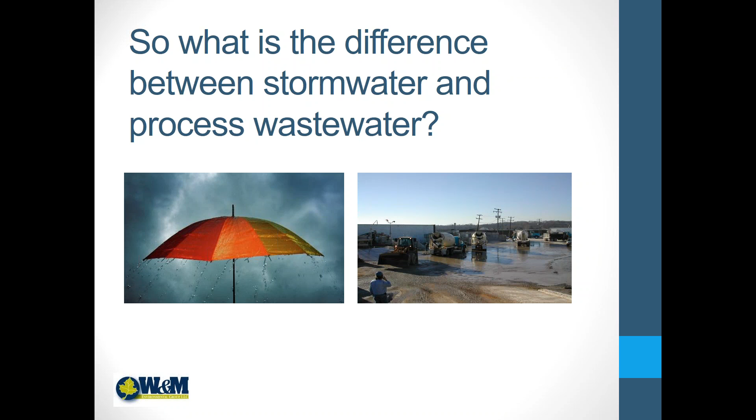So quick overview on TXG11 versus TXR05, because I know a lot of people are familiar with that stormwater only permit. The TXG11 is for those specific SIC codes along with a determination from the TCEQ if you think you're an associated facility, whereas the TXR05 covers a whole list of sectors and SIC codes and businesses that perform the same business in that sector regardless of their SIC code. You can authorize a ready-mix plant under the TXR05 under Sector E, but that is stormwater only, whereas the TXG11 allows you to discharge both process wastewater and stormwater.

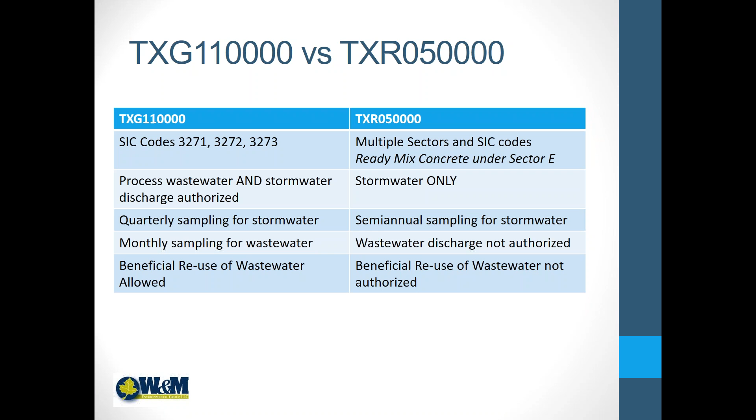So a couple of differences. A stormwater discharge under TXG11 requires quarterly sampling, whereas it's semi-annual sampling for the TXR05 permit. Wastewater is allowed under TXG11, and that permit requires monthly sampling of your wastewater, and no wastewater discharge is allowed under TXR05. The TXG11 also allows for beneficial reuse of wastewater for dust suppression and other things, which we'll go over later, and that would not be allowed under the TXR05.

So implementation. If you've decided the TXG11 makes sense for you, you have a wastewater runoff, the first step would be to figure out what type of water discharge you have. So we know stormwater only.

If you can contain all of your wastewater on site and none of it runs off and you only have a stormwater runoff, that is what I would consider a stormwater only discharge. Processed wastewater obviously is when you have that wastewater that goes out through an outfall or somehow it flows off your site. You can easily have both separately if you have some pits separated on one side of your site that discharge, and then you've directed all your stormwater through your stockpiles, for example, to an outfall on the other side of your site. You can have separate discharges.

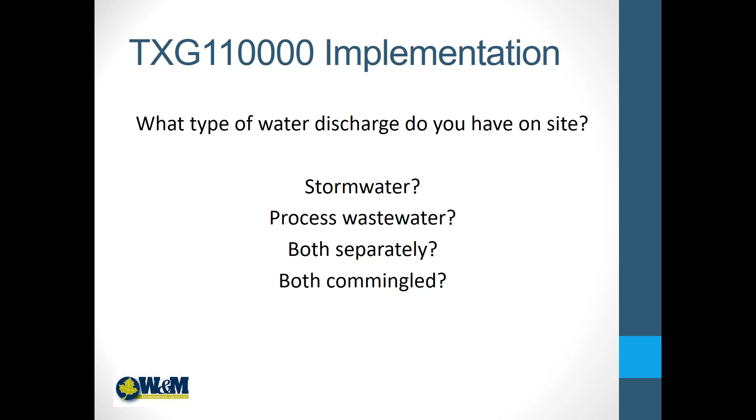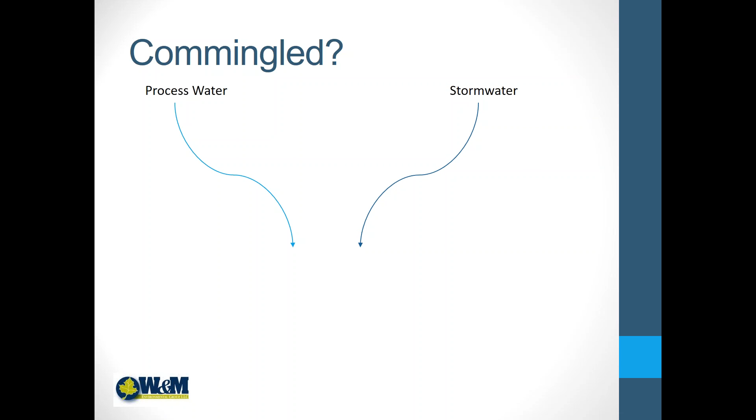And then what I've seen most commonly at a ready-mix plant is a commingled discharge. So what does that mean? You got your processed water and you got your stormwater. So this would be a separate. Let's pretend this processed water is on one side going out one outfall and your stormwater is running around your stockpiles going out a separate outfall. So what happens when those combine? That is considered a commingled discharge when you have processed water that mixes with stormwater and discharges through an outfall. And basically once that stormwater hits that processed water, it's considered a processed water discharge.

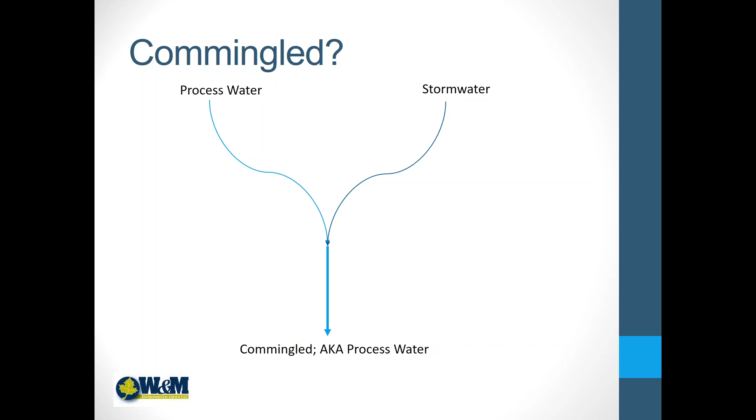One example that I've seen a lot, your washout pits at a ready-mix plant where the trucks wash down, they dump some concrete, dump some water into a series of ponds or pits on site, and then when it rains, all the water flow is directed towards those pits from your site. So when you have that runoff, that rainfall causing a flow across your site, it all ends up in that same pit where your processed water is. That is a commingled pit, really, and then when that pit runs to a little outfall point, that would be a commingled discharge, and in this case that is still considered processed wastewater under this permit. You have to separate that stormwater completely from your wastewater in order to have a stormwater-only outfall.

So implementation, again, once you've figured out what kind of discharge you have, if you have stormwater only on your site, if you've managed to somehow contain all of your processed wastewater where none of it runs off, you can claim stormwater only runoff, and in that case, I would honestly go with that TXR05 general permit. I've actually tried to submit a long time ago an application for a TXG11 for a ready-mix site that had stormwater only runoff, and the TCEQ suggested just going with that TXR05 permit. So it's a great option if you're able to contain all your processed wastewater.

Obviously that tends to be difficult. You use a lot of water at a ready-mix site. Processed wastewater discharge only, you would want to shoot for that TXG11 permit. And it would fall under the wastewater requirements only in the permit, so that means there's no stormwater plan required.

So if you have both separately, if you have a stormwater only outfall and a processed wastewater outfall only, then you would get that TXG11 permit, and your plant would fall under both requirements. There's a section in there for stormwater only requirements and a section in there for wastewater and commingled requirements. So for your processed water outfall, you would follow all the requirements from the wastewater section, which I'll go over in a second. And then for the stormwater only outfall, you would develop your stormwater plan and follow the requirements under the stormwater only section.

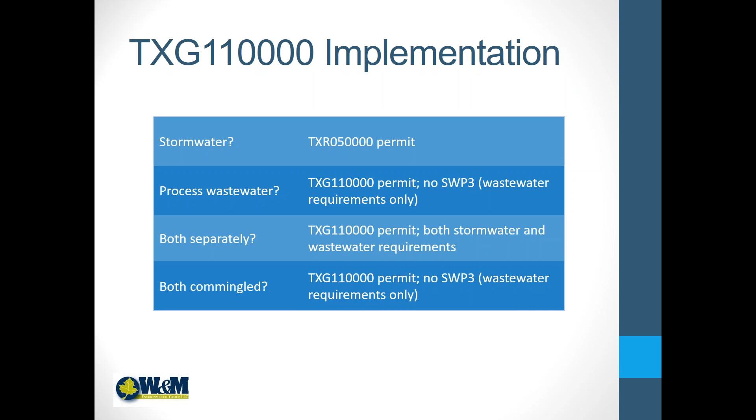And of course, if you have all commingled discharge, it's all commingled, processed and stormwater together, that means you have a wastewater only discharge, and it's the same as a processed wastewater only discharge. And you would follow the requirements of the wastewater side of the permit with no stormwater plan. And the reason there's no stormwater plan required if it's a wastewater only discharge is, when you think about it, common sense, you don't have stormwater running off that site. So you're not required to have a stormwater plan in place to control it.

So within the TXG11 permit, let's look at the differences between a stormwater requirement and the wastewater requirement. And again, these wastewater requirements include stormwater commingled with wastewater. So there's quite a bit of difference actually between the two. Your stormwater, you only are required to take quarterly samples, whereas the wastewater discharge is monthly, and there are different parameters for those, which I'll go over in a second.

Your annual metals are required for both. That's one of the few things that's the same for both. The wastewater discharge has an annual WET test. That's a whole effluent toxicity test where you take a big gallon of water and they make sure a water flea and a fish is able to survive. Since it's a wastewater discharge, it's a toxicity test.

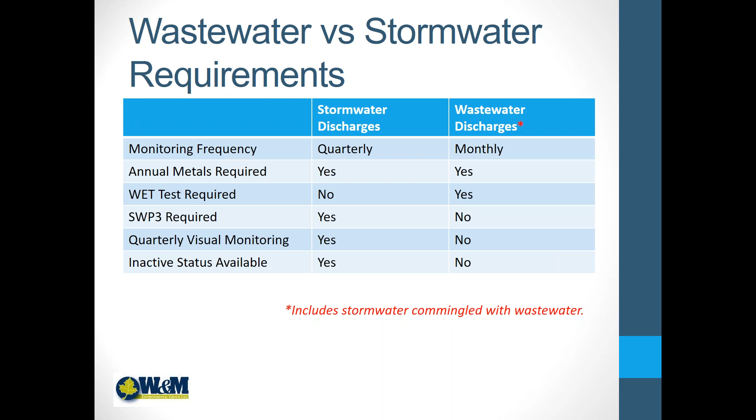And then, like I said earlier, if you have stormwater only out there, or any stormwater discharge, you would have to develop a stormwater plan, but you wouldn't if it's a wastewater only discharge. To go along with the regular stormwater permit, you have quarterly visual monitoring as well for a stormwater discharge. And then they have a new clarification for the 2016 permit, and that's this inactive status, which is only available for stormwater discharges. And I will go into that a little bit more in a minute.

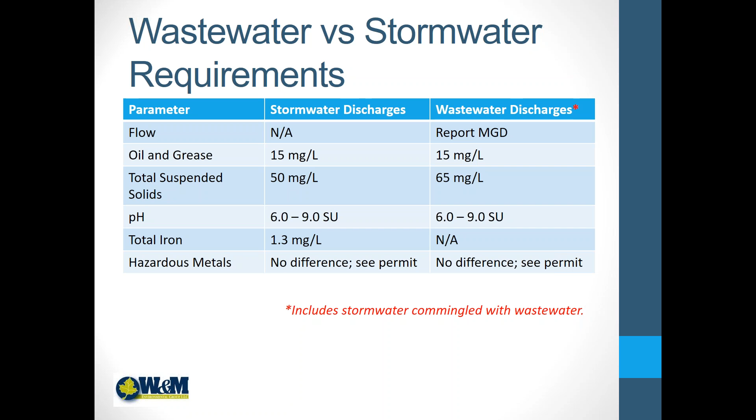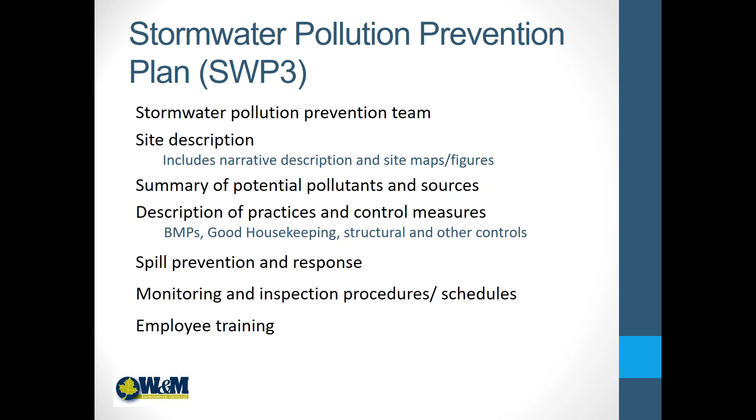And this is just kind of a brief summary of what you would have to implement if you did have a stormwater-only outfall. You would develop a full stormwater plan for that outfall and any drainage areas leading up to that outfall. And all these details are listed out in the permit. Not a ton of changes there. So there's your basic summary of the difference between the TXG11 and the TXR05, and then the implementation, if you do choose the TXG11, choosing your outfall type, stormwater only versus wastewater only.

So the permit is renewing in November. Let's talk about those changes that are coming up. So they made a couple definition changes. They've clarified the associated facilities definition, and it's for facilities that are associated with ready-mix plants, such as temporary batch plants, concrete product plants, and then maintenance establishments where you wash or maintain vehicles or equipment associated with a ready-mix plant.

The domestic sewage definition was rewritten just to be consistent with the TCEQ wastewater rules, and it does clarify that domestic sewage wastewater is not authorized with this wastewater permit. And then they added the total maximum daily load definition for 2016.

Another change across all the permits that they're renewing right now is this electronic submittal update, and it is being added in order to comply with the new federal electronic reporting rule. So the DMRs, your discharge monitoring reports, where you let the TCEQ know the results of all your sampling, must be submitted online through the NetDMR system as of November 8th, the date the permit comes into effect. And then the next year, September 1st, 2017, is when all the notices of intent, notices of termination, notices of change have to be submitted using the e-permitting system, which should be STEERS.

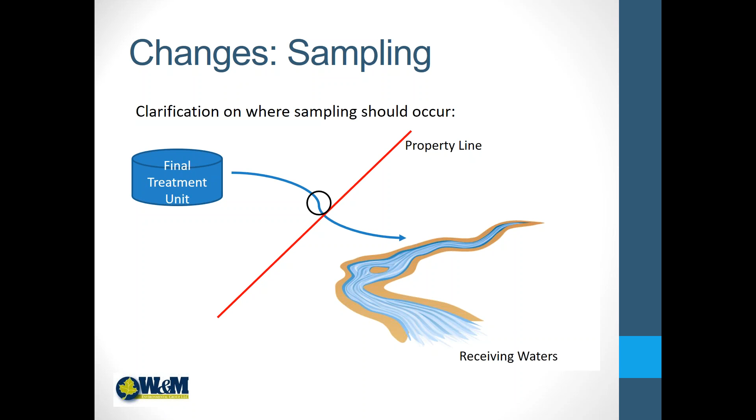I know I'm used to saying keep your records on site for 3 years, and I've said 3 years for a long time, so this is new this year. They're changing the recordkeeping retention requirement to 5 years to correspond with the length of the permit. Just keep that in mind with your training when someone on a site asks how long they have to keep an inspection record. It is now 5 years to keep that on site instead of 3.

A couple other recordkeeping changes: they have added language to clarify that your attendance list, when you do your SWP3-required training, now has to be maintained on site. That's just clarification — it didn't actually state that these lists had to be maintained on site, and now it does. Same thing with the rain gauge monitoring: if there's no rain during a given week, you'll have to monitor and record a 0 rainfall total or no rain for the week, and that wasn't specific previously in the permit.

Again, these are relating to a SWP3 — these three actually relate to SWP3s. So if you have a wastewater-only discharge, this won't apply to you. But if you do, like a lot of plants have a stormwater discharge as well, these will apply to your stormwater plan.

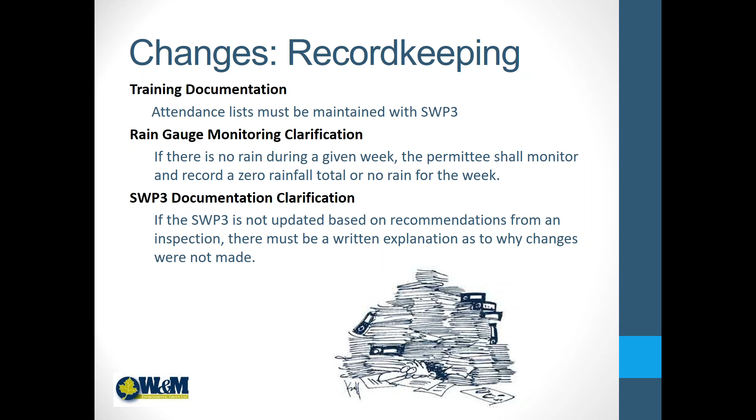This is another change going across all the permits, based on an EPA update to the minimum analytical levels done in 2010. These new levels came into effect in July of 2014, so every time these permits renew now, the TCEQ is updating that MAL in there for the metals. So where this really affects ready-mix plants or water samples is...

...when you want to report a 0 discharge versus a below-detection-limit discharge. The minimum analytical levels are a lot lower than your effluent limits. So as of right now, the lab can detect to your effluent limit, and if it's below the effluent limit detection, you can put below detection limit, but you cannot report a 0 milligrams per liter discharge unless they detect down to these minimum analytical levels. And that really could affect your hazardous metals waiver more than anything, and that's stormwater only again.

Another change to all the permits: they've clarified the Endangered Species Act language to apply to aquatic and aquatic dependent species. That word 'aquatic' was not in there previously.

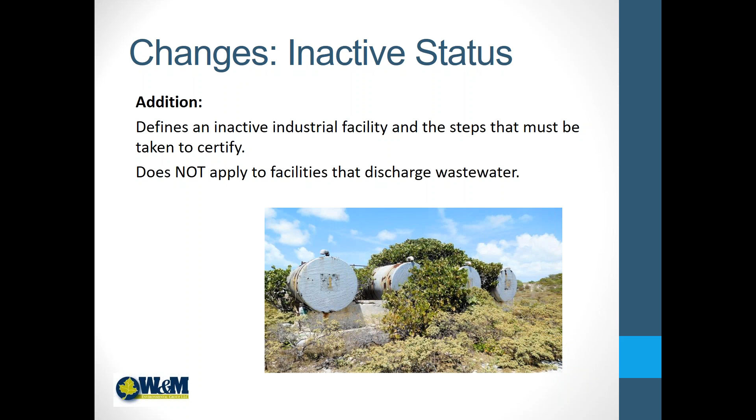If you don't have materials or activities exposed anyway, you can submit a letter to the TCEQ region and declare your facility inactive for a period of time. Then when you're ready to start back up again, you just submit another letter within 30 days of starting up to let them know you're going to start activities again. So you don't have to do your sampling, inspections, etc. during your inactive facility time.

A couple other changes, they've added a little bit of clarification. Right now, if you're an unsatisfactory performer under TCEQ classification, you could be denied this permit. This clarification allows someone to go through a hearing and talk to the executive director before their permit is denied or suspended due to being classified an unsatisfactory performer.

They've updated 'representative storm event' to now be 'qualifying storm event' to be consistent with the TXR150 permit and its new definitions. And they've changed beneficial reuse—it used to be on-site dust suppression, soil compaction, irrigation, fire protection. It's now just 'beneficial reuse.'

It's an update and clarification on what you can use your wastewater and stormwater for. It also updates and says make sure you don't apply the wastewater and stormwater to land during a rainfall event or when the ground is frozen.

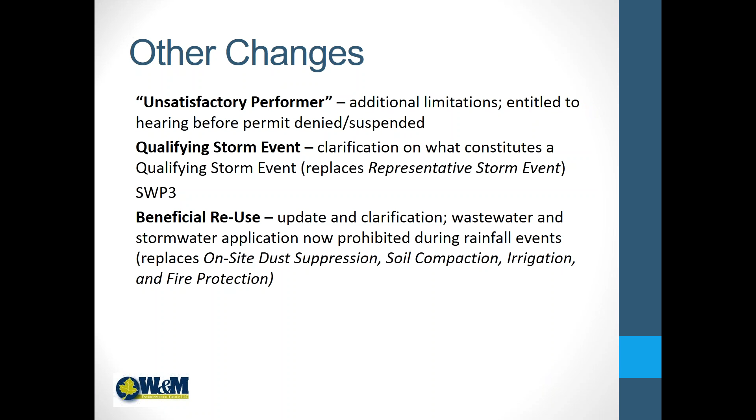So your renewal timeline: if you already have one of these permits, it does expire November 7th. The revised permit will be effective November 8th. If you do have a stormwater plan existing, you would revise that stormwater plan before you submit your new NOI.

If you decide you have a stormwater discharge, you would prepare a stormwater plan. Otherwise, if you just have process wastewater discharge, you can go ahead and prepare your new notice of intent and submit it within 90 days. I show that as February 5th on the calendar.

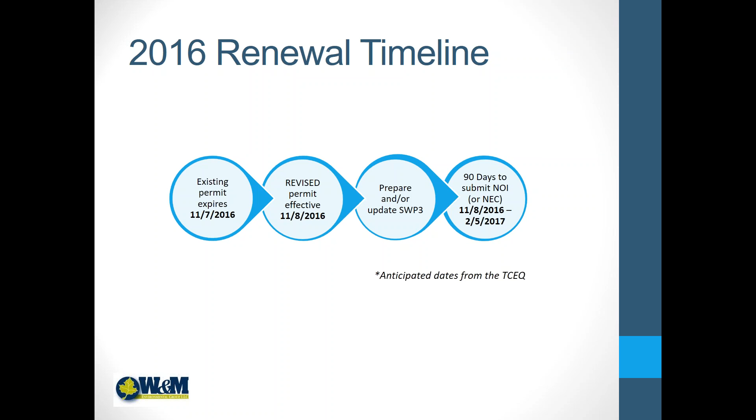So once again, November 8th is the revision date. Hopefully February 5th will be the 90 days after renewal to submit your new NOI. If you do have a SWP3, make sure you update that beforehand—it will have you certify that it's updated before you sign that NOI.

This is a really good time to evaluate what you have on your site, see if you need to make any changes to your SWP3 or to your management practices, even if you only discharge wastewater and aren't technically required to have a SWP3. It's still obviously a good idea to have good management practices on site so you can stay within those effluent limits on that wastewater.

I will say the TCEQ had this permit on the agenda on October 19th. It should have been approved. They have not posted the final approved permit yet. I doubt there will be any drastic changes to it, but if for any reason there happen to be, we can publish something or send out emails letting you guys know of any crazy drastic changes after this draft permit. And that's it, that's all I have.